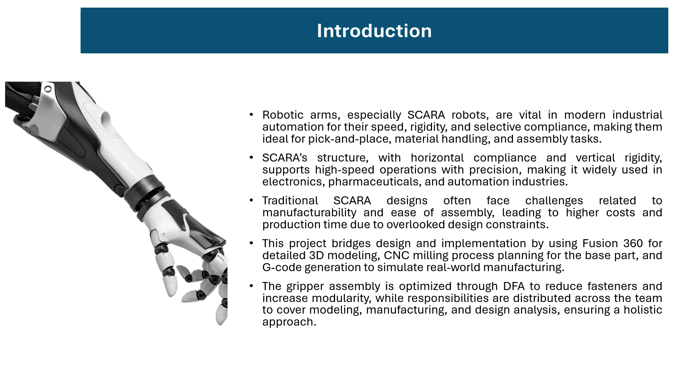Regarding responsibility distribution, the work was distributed in the team: five members each designed four parts, two members were responsible for the project report and presentation, and one member handled the CNC milling and generating the G-code.

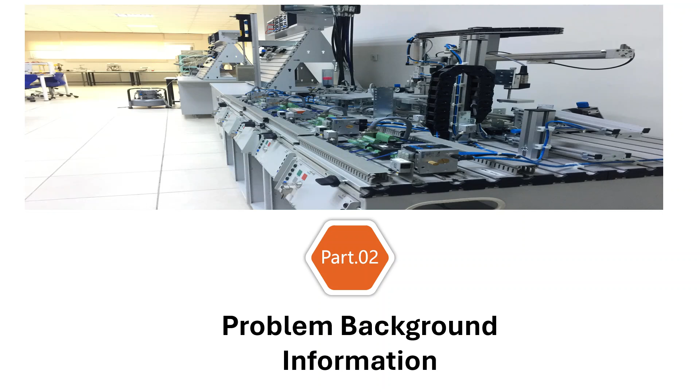Let's move on to the next step. What's the background problem we are solving in this project? SCARA robots play a vital role in automation due to their high speed and performance.

Despite their advantages, SCARA systems face challenges in mechanical design. They are not up to the mark when we compare speed or time, manufacturability, integration, and efficient assembly, due to complex part geometry and interfaces.

Using Autodesk Fusion 360, this project covers the entire design process from 3D modeling to simulation and manufacturing plan generation, leveraging modern CAD and CAM tools.

The base part was selected. We selected only the base part for CNC milling to demonstrate real world manufacturing. The gripper assembly, as I mentioned, was chosen for DFA, design for assembly, where we implemented changes to enhance its modularity and reduce the fasteners.

Let's move on to the next one, about the modeling and assembly. As I told you, we selected five members to do the design, and the rest of the members handled the presentation and CNC milling. So these are the first six designs we have done.

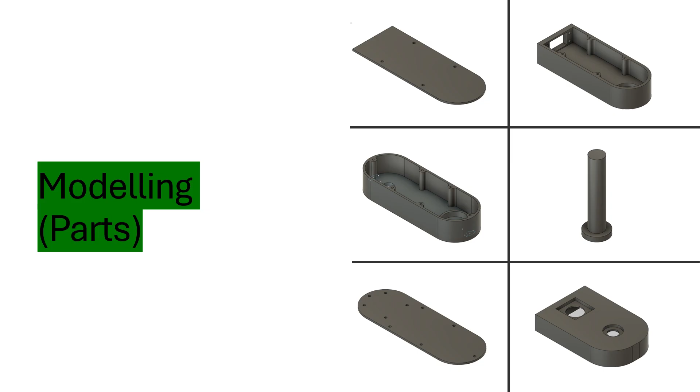It has the base and the screw fastener. Let me show you in Autodesk. These are the designs.

All 23 parts, like base, arm, bolt cap, connector, gears, and the gripper. The gripper is the gripper holder and the main, and this is the full assembly.

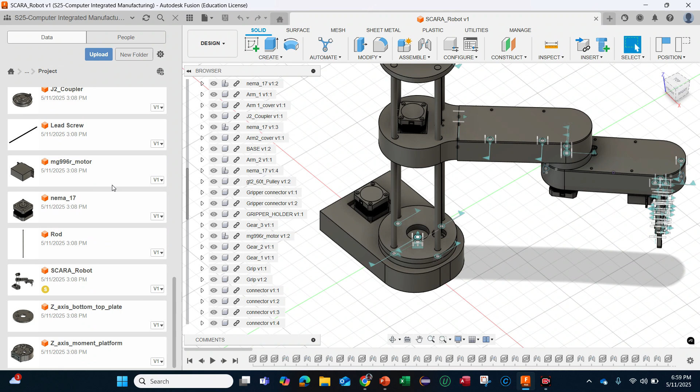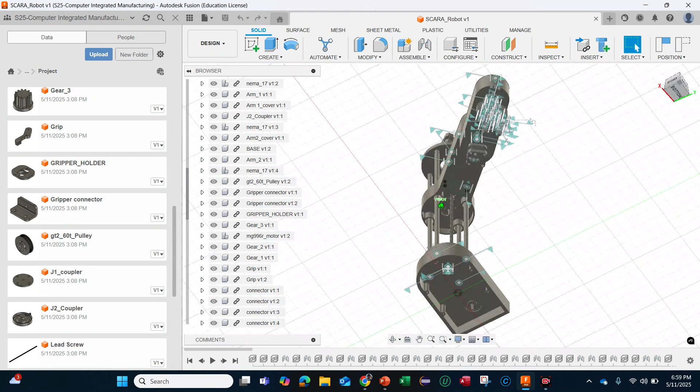This full SCARA robot consists of 23 parts. All 23 parts are assembled to form this SCARA robot. This is the SCARA robot.

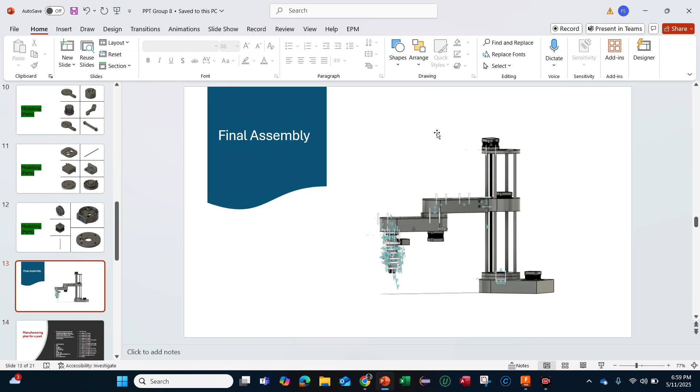Let's move on to the next slide. On the next slide, we have listed all the equipment, all the parts of the SCARA robot, 23 parts. The final assembly looks like this, as I have shown you in Autodesk Fusion.

For the base, we have selected the base part for the CNC milling process, and this is the G code which is created for the base part.

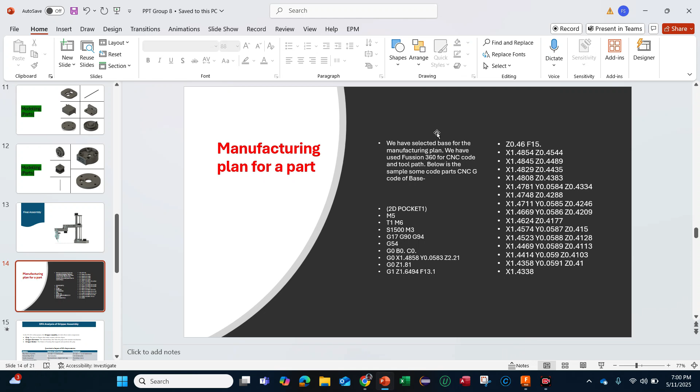After that, the DFA analysis for the gripper assembly. In this SCARA robot project, the gripper assembly includes three main components.

One is the grip, the jaw or fingers that make contact with the object. The grip connector, the intermediary that links the grip to the actuator and mechanism. And the grip holder, the whole frame of the housing which supports the position of the grip.

This is the improvement we have done in the gripper. Number of parts before the DFA design was three main parts plus five fasteners. After redesigning it, the main parts stayed three, but the fasteners were reduced to zero.

The assembly time before was 6 minutes. We reduced it to 2 to 3 minutes.

Usually the tools required for this were a screwdriver and alignment jig. With our redesign, you don't require any tool.

Interchangeability was none before the redesign; after that, it's interchangeable. Reusability was limited to some extent before, but after redesigning it, we can use it to a much greater extent.

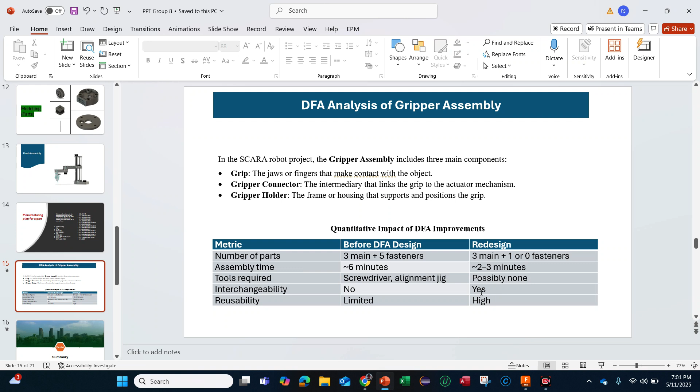Let's move on to the next one. Altogether, the summary is that we have demonstrated advanced CAD modeling and robotic system assembly using Autodesk Fusion 360.

We developed a CNC milling process and plans and the G code, highlighting the modern manufacturing workflow. We applied DFA and DFM principles to improve the modularity, reduce fasteners, and enhance the maintainability of the project.

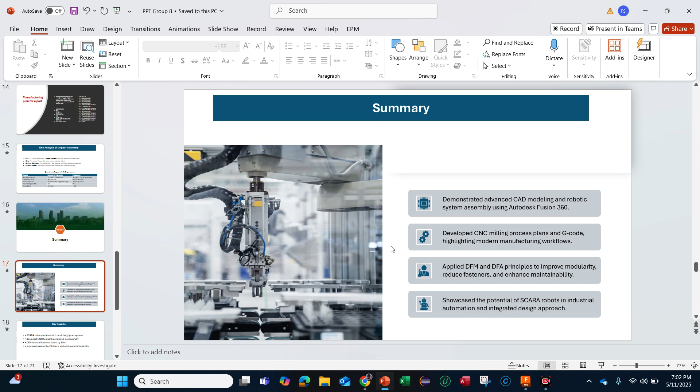The SCARA robot, modeled with a modular gripper system, was the key result of it. The whole point of this project was to improve the accessibility of the gripper part. So we have done it.

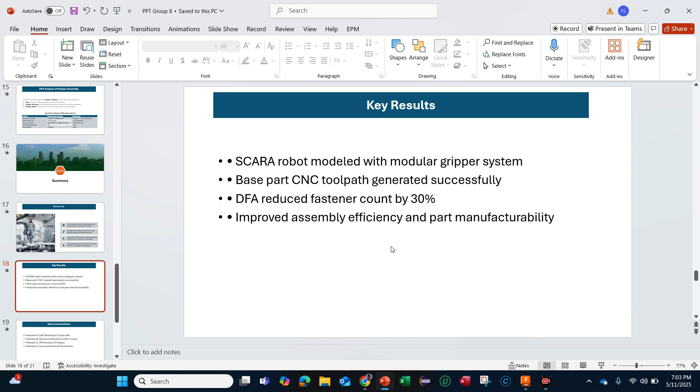The DFA reduces the fastener count by 30%. The base part CNC tool path was generated successfully. We improved the assembly efficiency and the part manufacturability of the whole SCARA robot.

The team, as I told you, we divided into four parts. One team did the CAD modeling in Fusion 360, and another team did the manufacturing plan and CNC code.

Another team did the DFA, the design for assembly, doing the major redesigning of the gripper — that was Team C. Team D was doing the documentation and presentation.